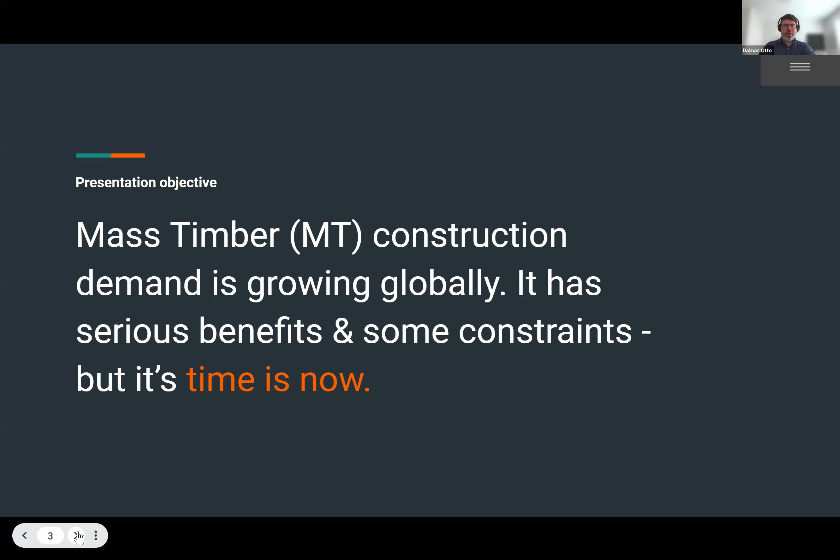So why mass timber? Mass timber construction demand is growing globally. It's no surprise. I think New Zealand has been on the forefront of this, and certainly in the work that we're involved with overseas, there's a lot of shared knowledge, a lot of shared interests, and also shared learnings across a range of different regions around the world.

So just the contents for today: a little bit of experience, although I won't go over that too much. Then contextualizing what is product development. We'll look at the products themselves. We'll look at some systems and projects, application. We'll look at some constraints and consequences, and then some round up around design for manufacturing, assembly, and disassembly, and the possibilities thereof.

Right now, I'm a full-time contractor with Lendlease's Kit of Parts team, operating out of Sydney, California, and Milan. We work on a range of projects and products, particularly the Google residential program. This is a joint development venture with Google itself in Silicon Valley, with the idea of constructing 22,000 apartments over the next 10 years, a lot of which will be mass timber buildings. So we're dealing with the IBC code over there, the Type 4 A, B, and C buildings.

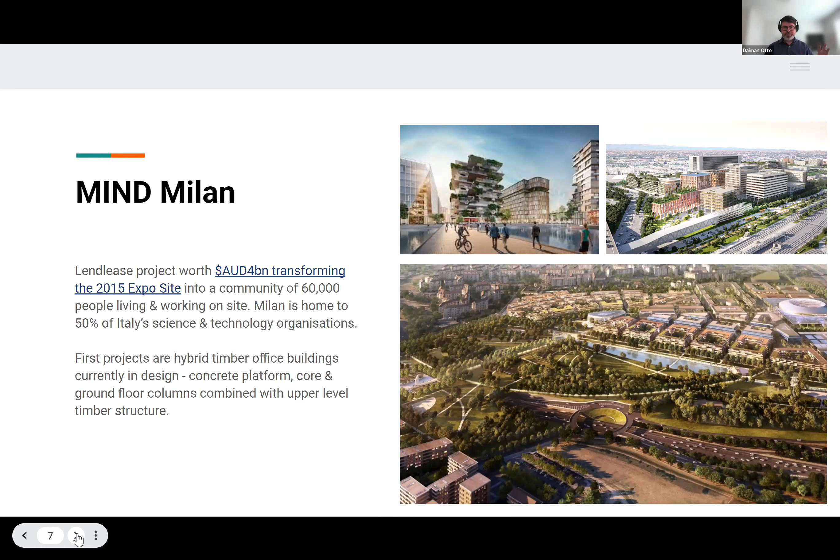And so basically what we do is product development. So what is product development? Product development as a discipline is very common in software and tech and manufacturing, but not so much in architecture, engineering and construction, which probably needs to happen more. We need to get more into a product development mindset in our industry. Effectively, product development is trying to understand problems in our industry, develop a hypothesis around how we might be able to counter those problems, and then collaborate and bring that to market.

And in fact, the team I work on has just brought a range of timber connectors to market, which you should be hearing about a little bit soon. That was with Lendlease's partners, Holmes Solutions, based out of Christchurch.

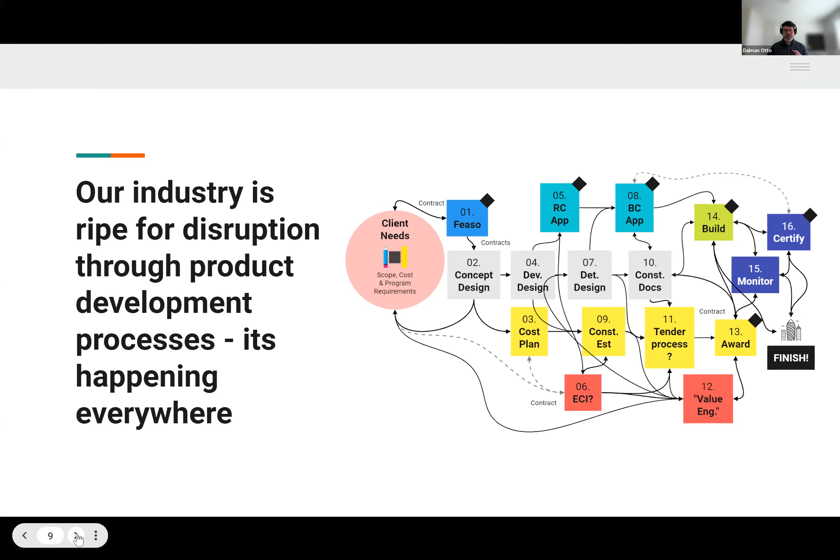So look, I think there's no surprise. You see this spaghetti diagram on the right. Our industry in New Zealand and globally is thoroughly ripe for disruption. So not just about mass timber, but about the entire building system, of which mass timber is a very fundamental part. But everywhere you look in the contractual chain, in the relationship chain, in the supply chain, there are opportunities for innovation, and that's really what product development is about in this industry.

So just to kind of put this, the 4 basic steps: the first step when you do product development is you uncover and understand the pain points of your clients. And I'm sure we could all list a number of pain points that we go through on a daily basis. Never mind our clients, never mind the end users, and never mind society, which ends up with these buildings that we create. So we do things like labor and activity analysis.

We look at code and practice. We look at materials and manufacturing, supply chain logistics, and most importantly, putting the client and the end user experience as the key data point that we need to consider when we're doing product development. The next thing we do is we'll create a hypothesis based upon stage 1 to test. So most of the time, what we're looking for is to reduce complexity.

We're looking for function doubling, so making something do more than one thing. We're looking to reduce activities on site, which therefore reduces labor. We're looking to shift labor, not necessarily just off site, but shifting labor from some kind of trade to another kind of trade to look for a delta. We're looking for health and safety increases, and we're also looking for new processes and materials.

The third thing we do is test through collaboration, and this is design and prototyping, so virtual and physical prototyping, time and motion testing, simulation, of course, working with supply chain, and then we're looking for feedback loops. We're looking for a go or no go at that point, because the next stage is to integrate that product into a project and bring it to market.

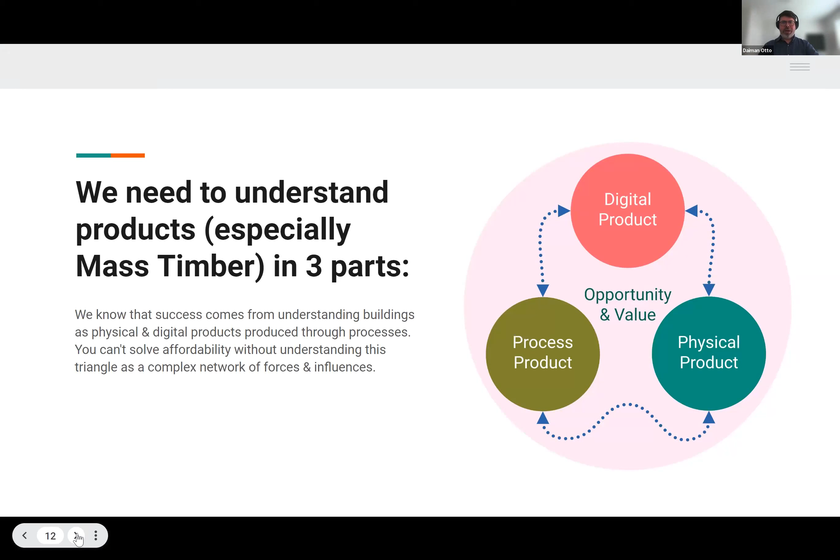So when we talk about the physical product, we're talking about three broad categories: LVL, glulam, and CLT. Of course, there are other sub products, I guess you could say, like nail laminated timber. But effectively, these are the three basic building blocks we have. In New Zealand, LVL is probably used far more than glulam. Offshore, where we typically work, glulam is used completely inversely proportionate to LVL. But these are the basic building blocks that we work with.

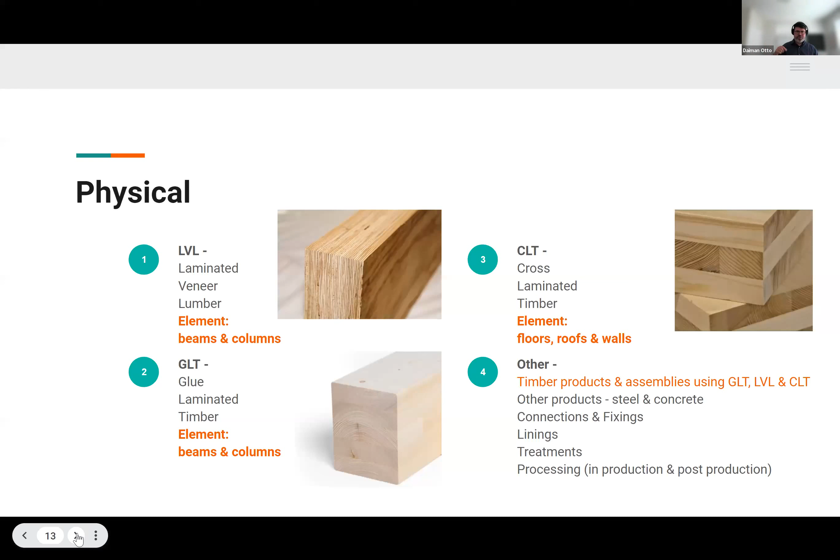Also obviously steel and concrete that's used, the connection fixings, the linings, the treatments, and the processing, the CNC processing and other post-production processes.

So why is there a global race to solve for mass timber systems? Everybody that we are in contact with, everybody in our team, is effectively in a race to solve for mass timber against BAU, business as usual, which in California is typically concrete. In other places, there are other kinds of systems, but there is a huge investment going into trying to crack the code for mass timber systems.

And there's a bunch of reasons why we would do that. Three just right there: 20% of the weight. So we look for savings of foundations, carbon emissions, of course, absolutely massive. And then I guess the fact that it's a renewable resource. There are a bunch of other factors that we're interested in that are less measurable, such as biophilic value.

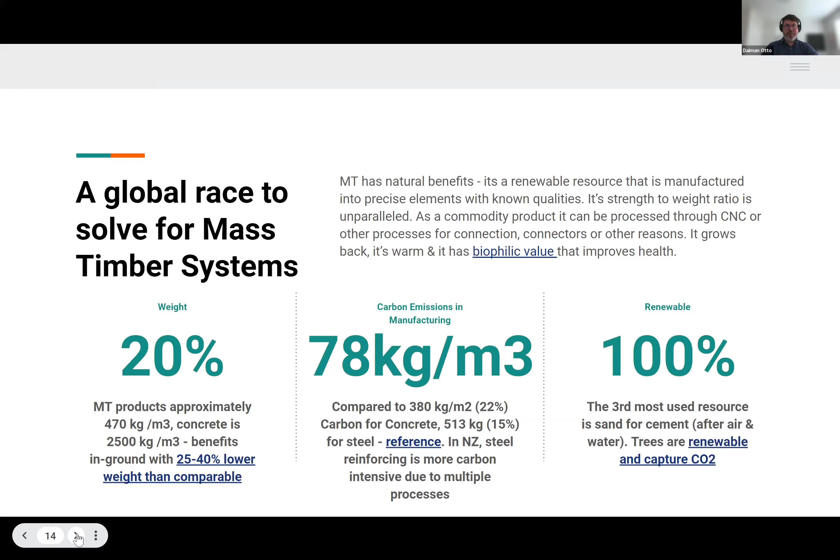But ultimately, there's so much incentive right now to solve for this particular kind of product to be able to ramp up at scale. You're seeing CLT producers and providers increase their number, increase production to try and keep up with demand, which is effectively doubling every 4 years. In New Zealand, we have access to all of the main suppliers of the products that we need to create the buildings we want to do, which is fantastic.

And also in New Zealand, we don't have the common need to sell the idea of timber to the client. We are a timber nation, so therefore we've removed at least one of those barriers for uptake. And obviously, there's a number of buildings produced over the last 10, 15 years that have been effectively pilot projects, trying to test and find the right combination of products, right combination of structure and other things to try and crack that code. We haven't quite got there yet.

There are also some common misconceptions that I think hold us up a little bit. One, probably very New Zealand centric, is moisture. Now, there's a lot of fear, doubt and uncertainty around moisture getting into CLT, which you simply don't find in other jurisdictions to the same level. And that's not because they've got different weather over there.

Sometimes they do, but effectively, in a lot of jurisdictions, moisture protection of CLT is somewhat down the list of concerns because there are other concerns that we need to look at. And probably the key concern right now that we're dealing with is acoustic performance. We get that relationship between span, thickness of CLT, vibration, and acoustic performance, which becomes quite an interesting feedback loop to try and resolve.

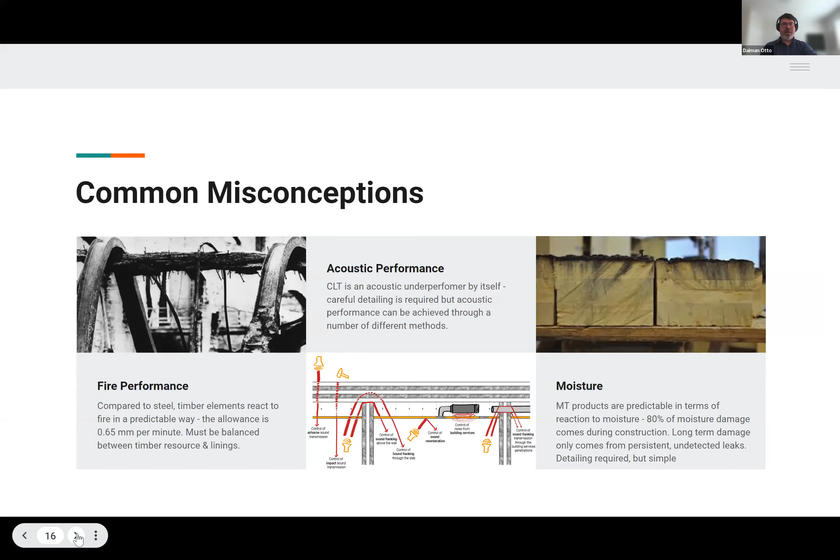One thing we do find is that policy in the States, where we mostly deal, is really driving towards exposure of CLT on a ceiling in a residential context, which means that you're shifting everything to the top of the board. But obviously you then have to deal with the underside of the board with respect to fire, because there's still a 2-hour fire requirement in the States for main structure.

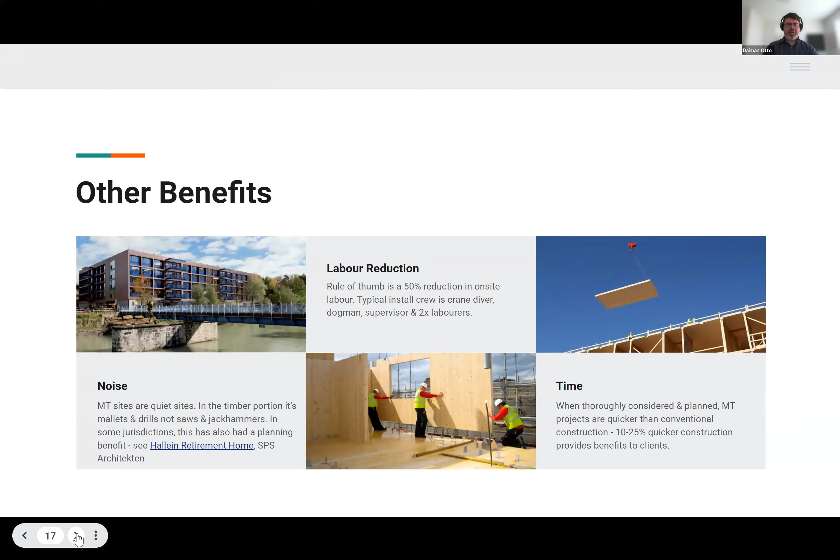And then there are other softer benefits like noise reduction. I was lucky enough to visit a retirement village in Austria, and the architect there told us that one of the main reasons offsite manufacturing with CLT was used was that it was a far quieter construction with far less impact on neighbours, which is something that we probably don't care that much about in New Zealand. But you kind of see those directions coming in. Labour reduction, time reduction, those are pretty well understood, provided that you get your design and your product strategy right.

There are also industry and policy drivers. Again, no surprises here. We are living in cities and countries that have made commitments to climate change. There is a C40 cities organization, of which Auckland is one. C40 cities is now something like C97, and basically they represent a quarter of global GDP. But effectively, the cities themselves are committing to policies that the market has not yet provided. So we need, as an industry, to create the solutions that our cities and our society can take up and start to use. And mass timber is critical for that.

Yeah, look, I'm not going to talk too much about global growth; we are all aware that every day you can find a new mass timber building going up somewhere. Demand is not slowing down, and it's happening everywhere. It's not just in the States, it's not just in Canada, it's across Europe and even into Asia as well. And I think we're at a bit of a tipping point right now.

So I look at the idea of electric vehicles as a bit of a parallel to mass timber buildings. The technology for car batteries has been there even before petrol was around, but there's a tipping point that we go through in which there's an acceleration of growth.

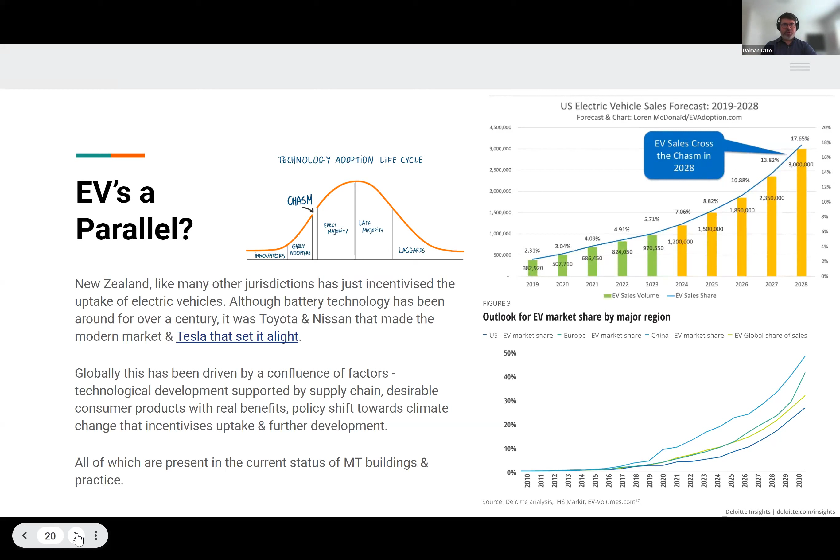And I think really the tipping point I find with mass timber is that when product and process match up together, and supply is there to back it, then you start to get an acceleration of uptake, or at least that's the hypothesis. Coupled with the policy shift that's going on, coupled with the general media and public interest around mass timber, I think it's a recipe for far more buildings to come.

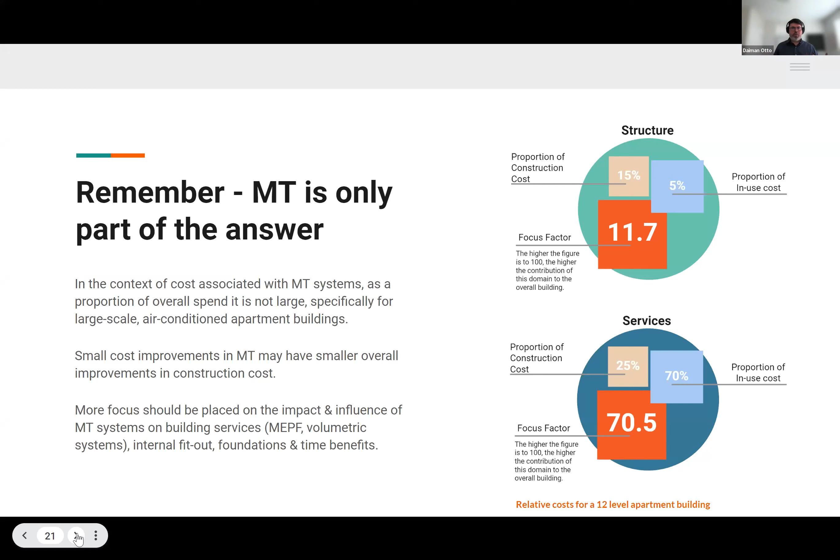But then if you look at the building services, in this case it's a fully ventilated and conditioned building, you make a 10% saving in the proportion of costs, you get a 2.5% saving. But more importantly, if you look at the cost around energy in use, it vastly outweighs the cost that you'd normally spend on structure during the life of the building. Which is to say that mass timber, from a product development perspective, is really about what it enables and what it allows for in the building rather than the product itself.

We have looked at a number of different systems and projects, which we'll go into in a second. And really, of the systems and projects that are available and have been tested and piloted around the world, I'd say that there's not one that makes vast sense over another. There are probably some that will fall out of favor, and we'll go into those in a second. But ultimately, what I'm saying here is that depending on the recipe or the construction methodology using mass timber, it's not like you choose a post and beam solution over a honeycomb solution and you get a silver bullet of cost saving. It doesn't work like that.

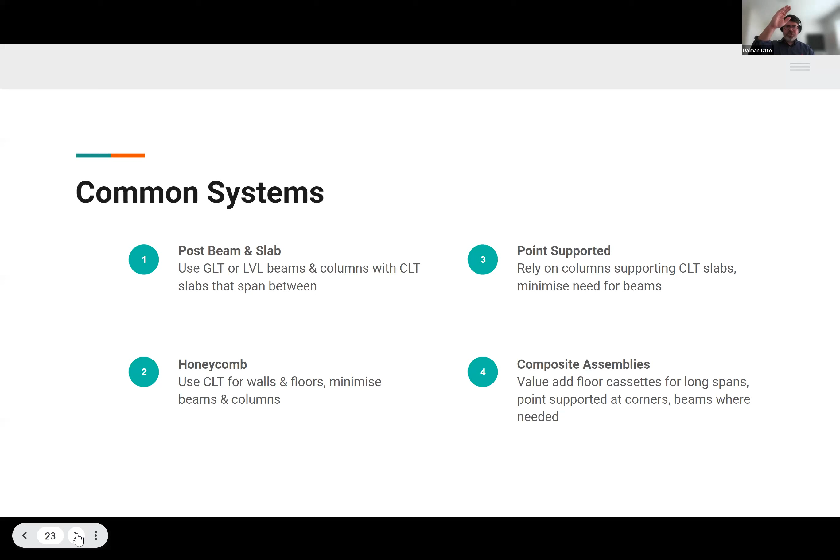So there are 4 common systems that are kind of recipes for how you put buildings together. The first one is a post, beam and slab, which is kind of an analogy to traditional construction. There's the honeycomb, which is where you use effectively CLT for walls and floors. There's the point supported, where you try and eliminate beams and just deal with columns and floors. And then there's some composite assemblies in which you combine products together to try and find an advantage in things like span and reduction of floor depth.

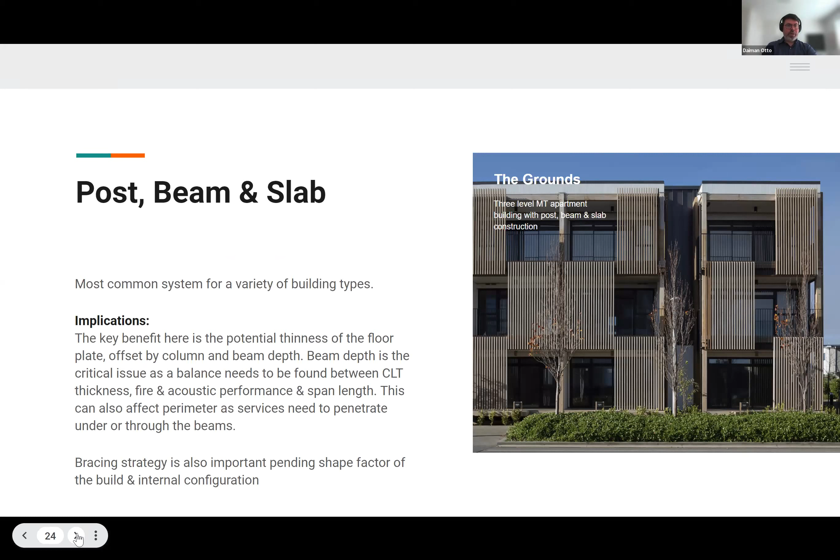So post, beam and slab, look, the grounds is an example of this. It's trying to find a mix between load-bearing, open spaces and bracing. And so I think that post, beam and slab is probably, from my perspective and what we're looking at, the system to choose overall when you look at the cost, I guess the overall trade-offs between what the system allows for, in a residential context I'm talking about.

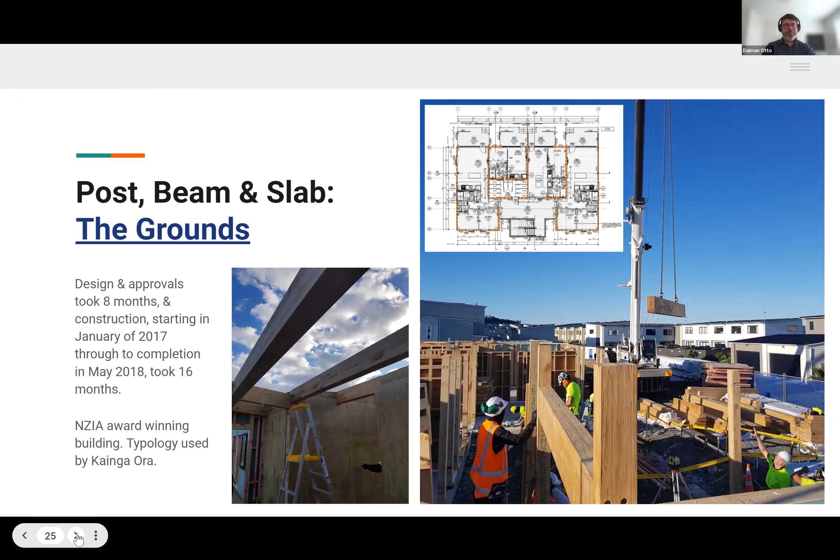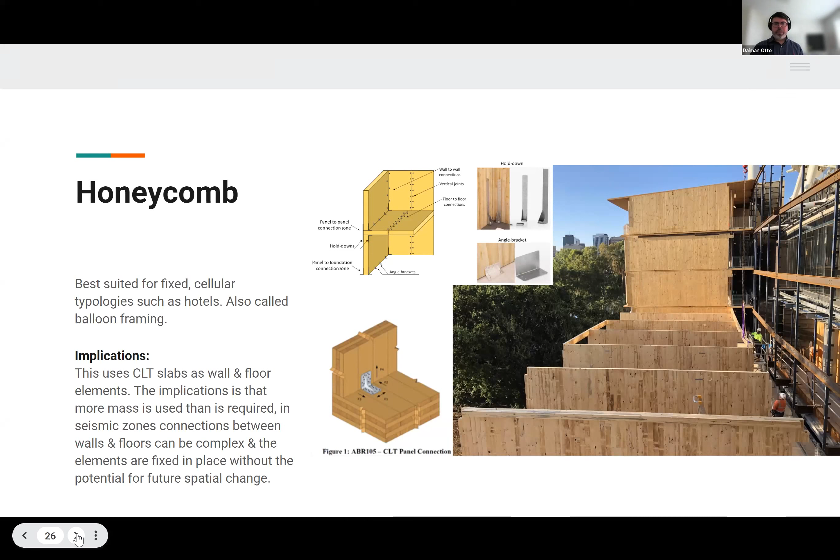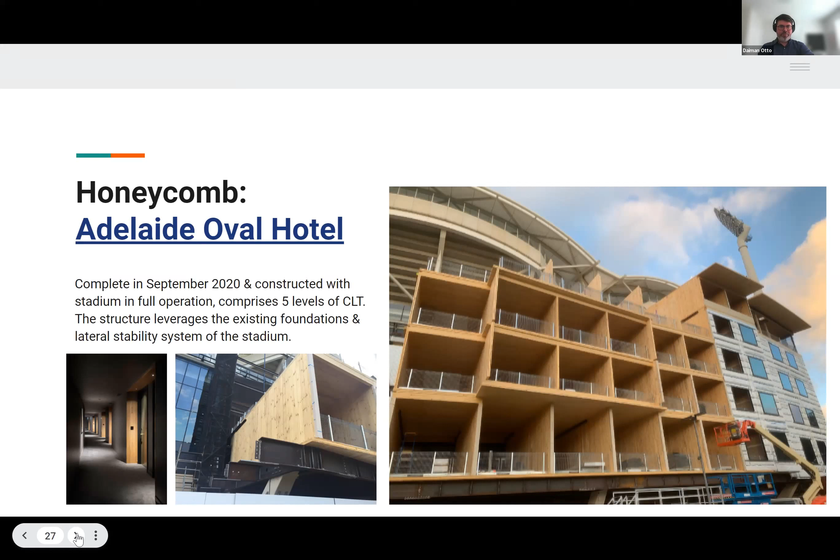There's the honeycomb structure, pretty good for quite cellular floor plates like hotels and student accommodation, things like that. But I know on the call there's lots of experience around this kind of structure in New Zealand, and we also know that there's some issues around things like connections and processing cuts as well. But still an appropriate typology, and this Adelaide Oval Hotel, which you may be aware of, is a nice example of that, effectively a building constructed on the side of the Adelaide Oval, whilst the Adelaide Oval was in operation, for a hotel, which is perfect use for this.

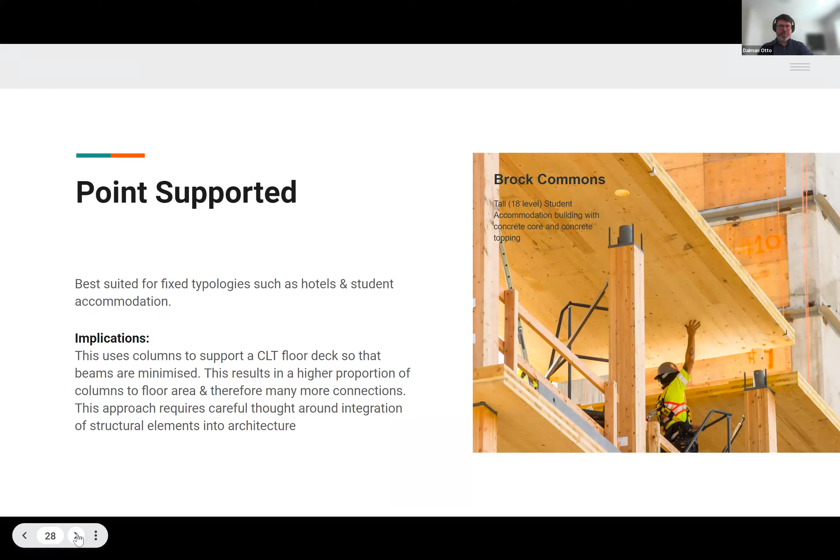Everybody knows about this one, Brock Commons. In some cases, it's a leading building due to its height and due to what it tried to achieve. But we are seeing that the point supported approach is not quite as common, but it still has its place. Key to this kind of system from what we're seeing is having really sensible connections, really easy connections, and also a very structured and sequenced way of bringing up your facade, of course.

Just a note on some of the differences between the New Zealand situation and the US situation when it comes to floors. So we find that in the States, the incumbent system for flooring is to pour gypcrete. And so you'll find that in mass timber buildings, there's an acoustic layer, and then there's effectively a pouring of gypcrete to increase mass for acoustic reasons, but also for fire reasons as well.

So it's not something we see here too much, or at least I haven't seen the use of gypcrete being used as a floor substrate in NZ. But I guess the other reason that it's used is that in California and in other states, they use the International Building Code, and mass timber buildings are driven by what we call Type 4 buildings. So you have Type 4 A, B, and C buildings, and each of those is limited by area and height. But the one thing they have in common is that all main structural elements need a 2-hour fire rating.

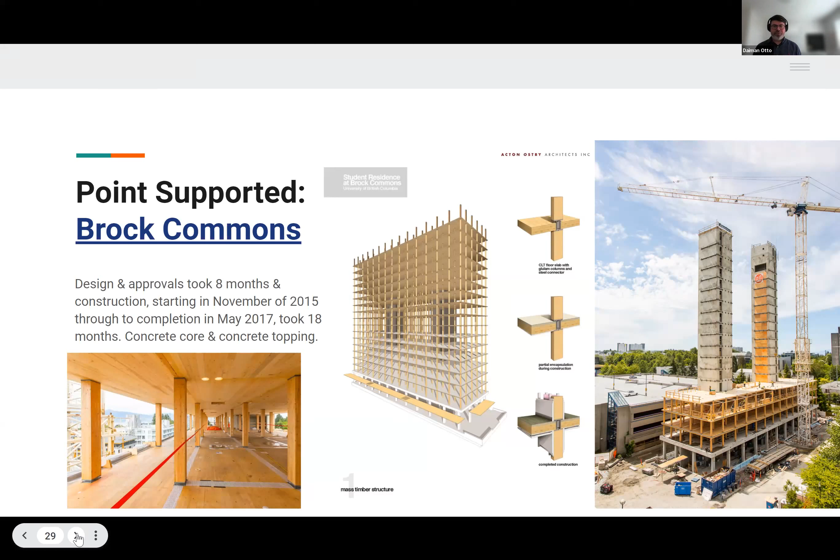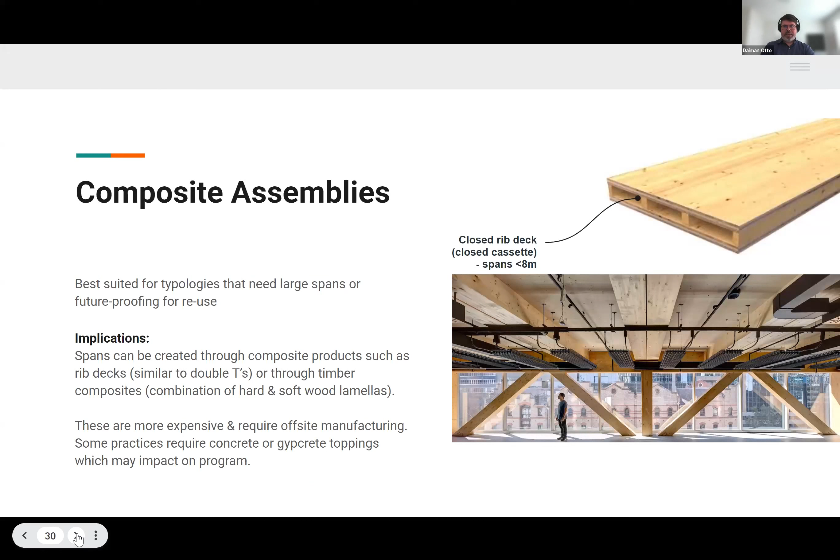And so you're getting into that space in which you are trying to find the best balance between acoustic requirements, fire rating, and structural dimensions of the product. Then there are composite assemblies. So these are assemblies in which you create something like a rib deck or a closed panel or a floor cassette. The main reason you would do this is to achieve longer spans, primarily. You may also be under pressure for overall building height because of planning restrictions. So if you go to a composite floor, you might be able to get a thinner floor out of it.

You can see this is Daramu House that Lendlease built a few years ago, which is operating a 9 by 9 meter grid. You have some very deep beam sections here, but then you can also have a kind of a composite beam slab option, and obviously allowing for exposed surfaces. This is a very deliberate choice by the client to expose this, but Lendlease was under pressure in terms of planning height to bring the height of the building down below a certain level. Nonetheless, a beautiful building, and for people involved in financing and investment of these buildings, it was heavily oversubscribed in terms of both investment and in terms of rental.

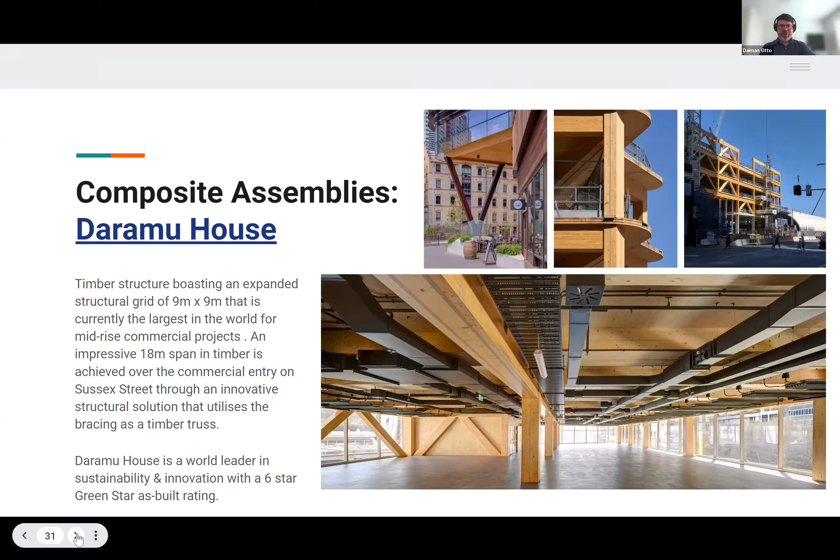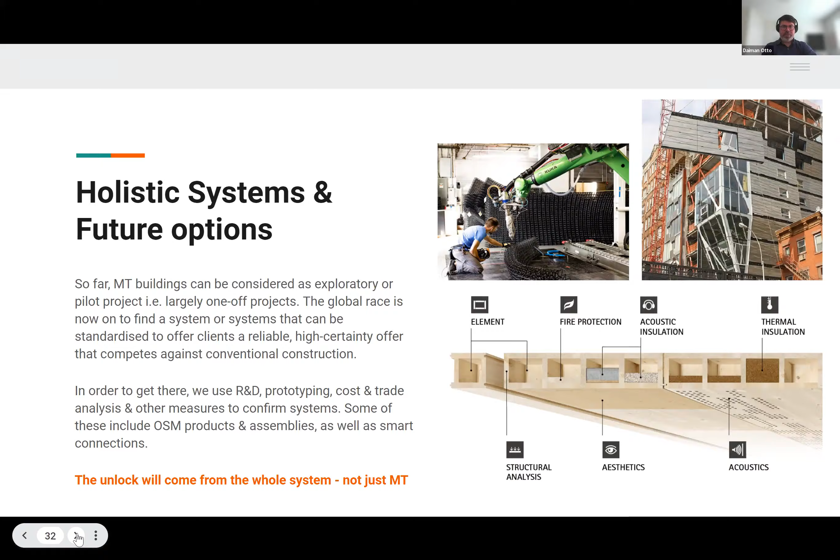And there are some future options that are developing. Lendlease has an Australian Research Council grant in which we partner up with universities like Monash and Melbourne University, University of Queensland, and so there's a study going on right now about low carbon long span floors, and so there's a lot of potential here. The key thing is that we need to balance off the value added potential of these kind of flooring systems against the labor that's required and the logistics costs that are associated with making these kind of panels. Because right now, no major CLT provider is able to offer a composite panel using, say, for example, ribs to increase the spanning capacity. But if anyone knows of somebody doing that, I'd be quite interested in finding out. So yeah, that'd be interesting to consider.

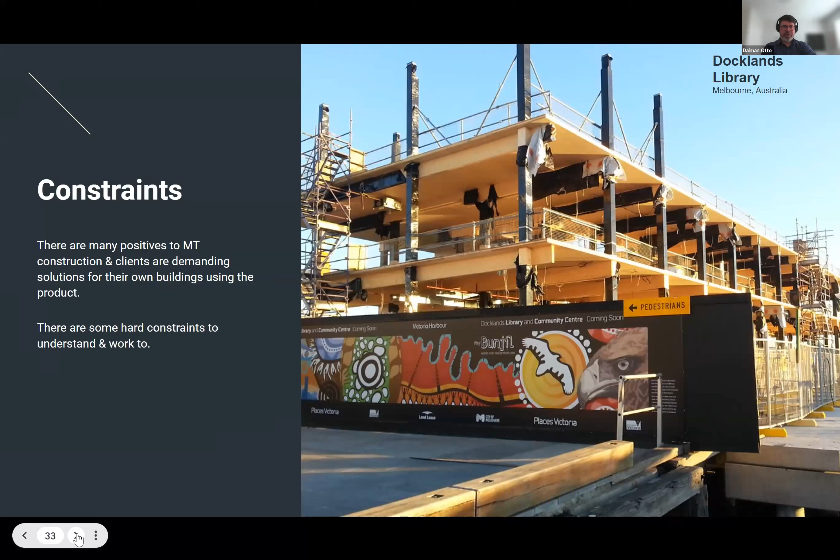So it's not a free lunch though, by any stretch of the imagination. Anybody who's worked in a mass timber building understands that we get into this area in which we have to balance trade-offs. We get into a real whack-a-mole situation in which we solve for something down here, something else pops up. And so in our work, we've identified around 14 major factors that go into an algorithm for choosing the best kind of system. And each of these factors can have different kind of effects. And so I talk about this in terms of procedural effects, asymmetric effects, and entangled effects.

So procedural effects is where in the serial nature in which we make decisions, one choice here flows on to the next thing, which flows onto the next thing. And basically, if we're not careful, you start to get waste building up. So for example, you make a decision about spatial grids, that in turn creates deeper beams that then might not be required if the spatial grid wasn't so long, which then creates building services issues in which you're starting to do things like punch holes through beams and increase processing costs and those kind of things.

Then there are asymmetric effects. So this is where one thing here has an outlandish or a far bigger scale effect on something else. So for example, you see this all the time in which structural calculations to drive section sizes tip into areas in which they pop out of the standard size range for a manufacturer. You get into the need for making the section size bigger and then trimming down the four sides of the glulam to get back down to the structural size. So you're paying for waste. And sometimes, depending on where you are, if you're dealing with glulam, the costs for block gluing can be exorbitant. Something like a 50 to 100% increase over the cost between a standard size and a block glue, depending on where you are, of course.

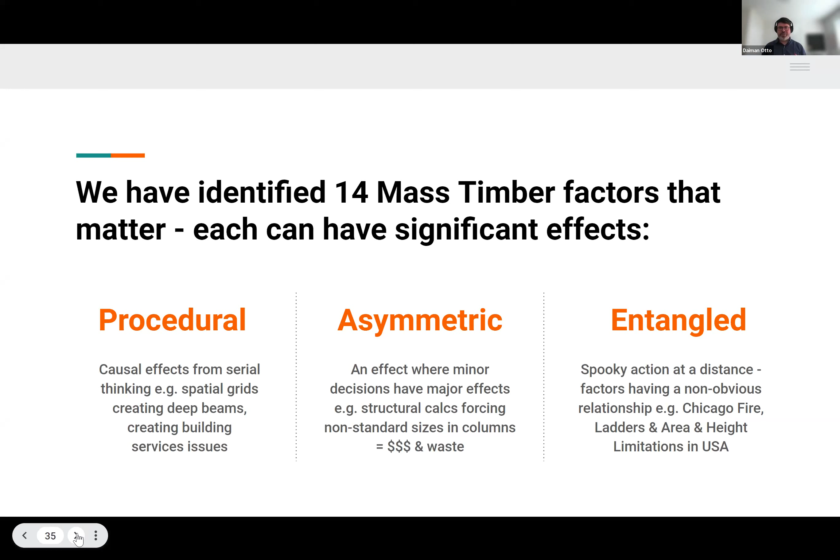And so I'm just going to pick up three of the factors that we typically deal with. So the first one is this relationship between acoustic and fire. As I mentioned, in the States where we do most of our work, there's a 2-hour fire rating for the main structure. What this means is that prescriptively, you either coat or cover everything in 2 layers of plasterboard, or you size the timber member up to account for char for 2 hours.

And so on one hand, you're paying for more material, on the other hand, you're paying for more labor. Never mind, both of those situations don't do anything for your acoustic requirements. In the States, they have the same STC IIC rating as we do. So typically, they're looking for a minimum of 50. They don't do field testing, but there's a requirement there for that kind of rating. So we all know we have to add things to mass timber to get it to perform correctly.

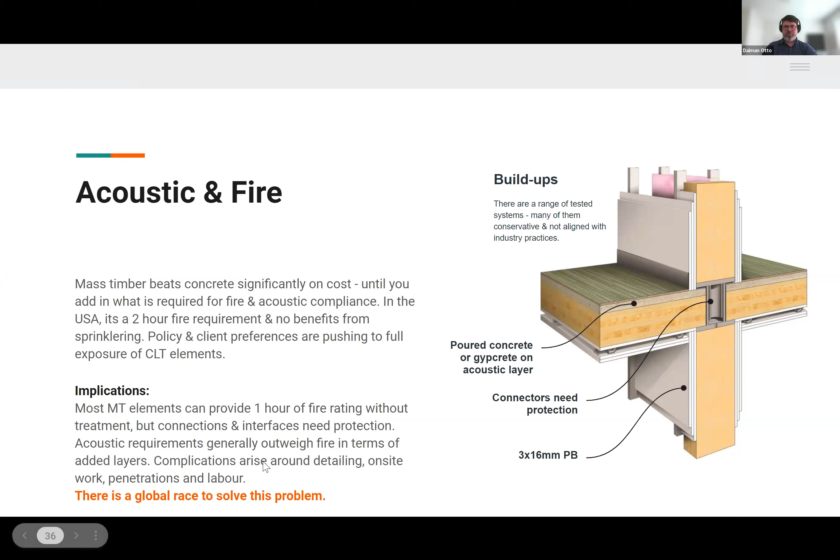As I mentioned before, in the States, gypcrete is the primary way of dealing with this. And in fact, what sounds like a bit of an anathema, introducing a wet topping inside a dry construction methodology, is actually the most efficient way of doing it at this time. But I think we all know there's a global race to try and find the fix for this. And so there'll be some way of solving, or making more valuable, the things we need to do to CLT to get that to stack better in terms of cost.

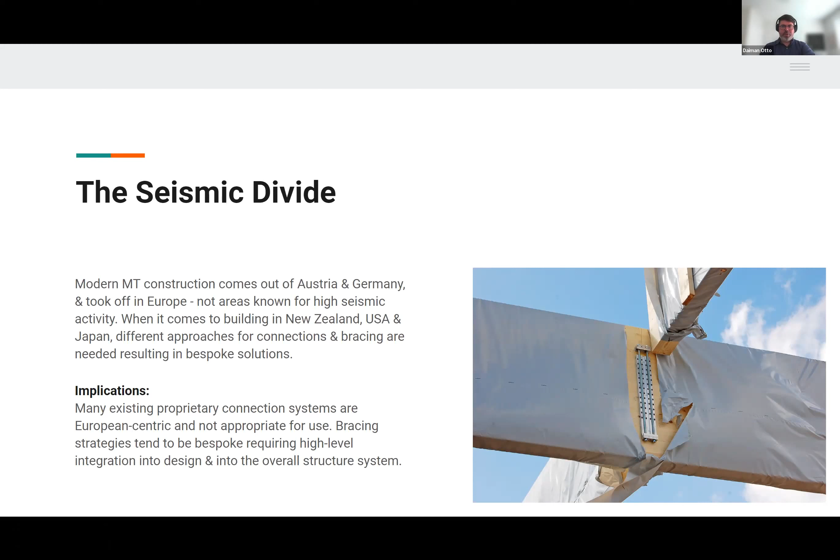So one for us is the seismic divide. We know that modern mass timber construction primarily came out of Europe. When we look at the proprietary connectors that are available for mass timber buildings, we find that a lot of them just simply don't respond to the kind of seismic requirements that are in New Zealand, the US, Japan, and other places. So there's quite a lot of interest right now in the connector space, and I know a lot of people are working on this. I'd suggest reaching out to Holmes Solutions, who have just completed bringing a connector system to market with Lend-Lease. So that's something to look at.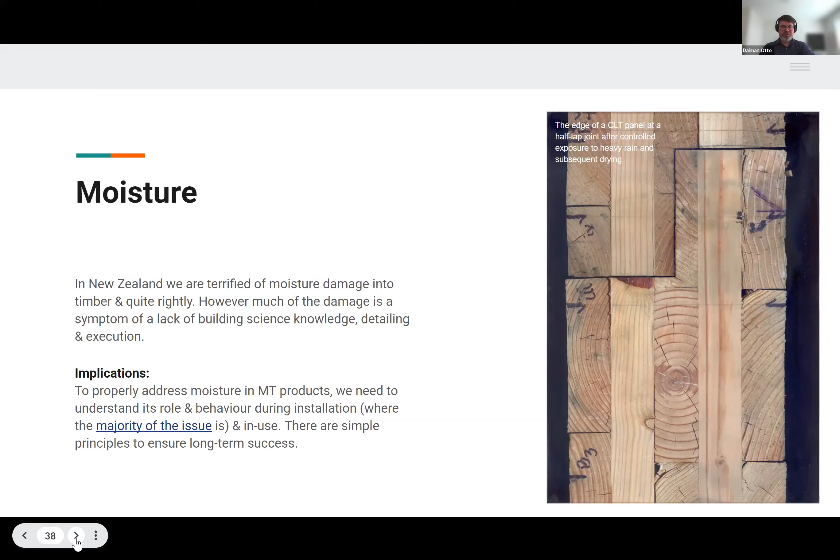And lastly, moisture. I think I touched on this before, so I won't go into too much detail here. But all I'd say is in the 14 factor model that we have, moisture is down the track somewhat. We all know that New Zealand is reasonably unique with respect to treating all bits of timber effectively. This is not the case in other places. From my perspective, building science and building physics is the way to deal with moisture in buildings when it comes to mass timber. We also know that by far and away, most of the damage comes during the construction phase. So we have to treat that very seriously, of course, but it is treatable.

I've got a few more slides left to allow any time for questions, but I just want to touch on design for manufacture, assembly, and disassembly, and supply chain integration as basically critical for the successful rollout of mass timber systems.

So the principles for mass timber: the first thing we need to do, as I mentioned before, is manage these trade-offs. And I'm sure a lot of us on the call would be familiar with this whack-a-mole situation that goes on, in which we are trying to solve for a certain aspect of building, and then discovering later on that that has some implications for some other aspect. So from my perspective, it's about trade-off management. There is no perfect solution. It's just about the most perfect given the settings that you choose as the ones that you want to try and hit.

The next one is the physical to digital relationship. So one of the key drivers of mass timber uptake is the fact that you can get to a point in which the design information can drive manufacturing information. There's still a threshold there, which is quite hard to cross in terms of software and those kind of things, but that's being worked on now. That won't be so much of an issue in the future. But the idea that whatever you draw can effectively be processed during manufacture is something that's quite unique in terms of its precision.

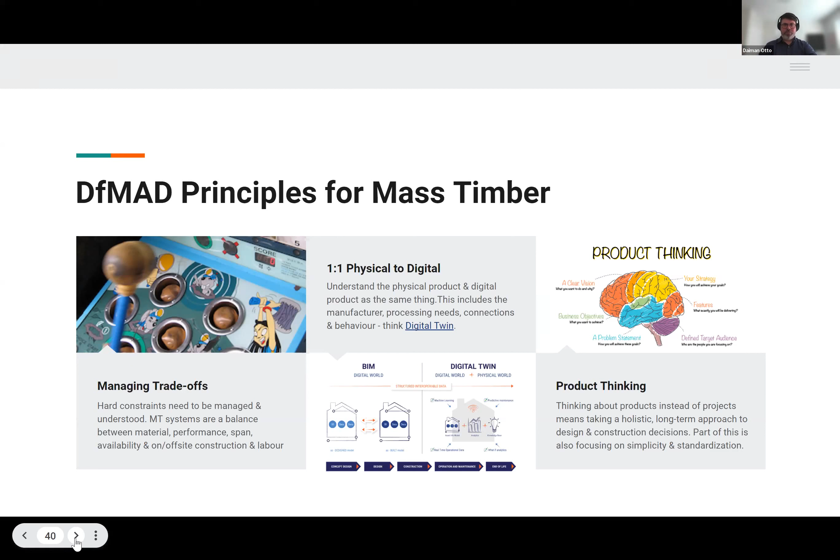And the other thing is to think about this in terms of product. So instead of the collective amnesia we have with respect to projects, thinking about projects as one-off discrete things, we need to start thinking about product thinking in terms of scale, in terms of efficiency, in terms of learning from feedback loops and folding them into getting ever better at what we do.

So if we are able to do design for manufacturing and disassembly correctly, there are some things that are facilitated by that. The first one is we can get into day one circularity. By which I mean, as we are designing a building or a system, we are able to attribute to that specific element a kind of recipe for circularity over time. But if we're genuine about circularity, we have to understand that maybe that beam needs to be disassembled at some point, which means we have to think about connections, which means that wet permanent toppings sitting on top of materials that could potentially be reused is not the way to go in the long term.

The next one is deep data. So whilst we are attributing a circularity recipe for everything inside a building, we can also understand the embodied carbon, the carbon to manufacture, the carbon sequestered, and effectively the responsibility we have over the long-term life of the building to preserve that carbon and take ownership of that.

And the other thing that's interesting is design automation. I recommend having a look at Lendlease Podium's website, in which if you take a product thinking view, you're able to effectively get into design automation, in which you move well beyond BIM into an instantaneous instantiation of building systems down to LOD 400, 500 for manufacturing in minutes rather than months.

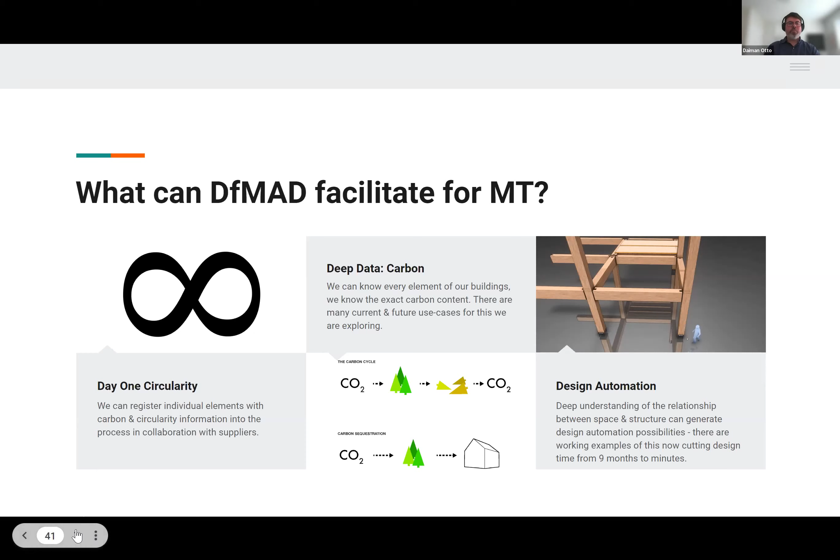So just to summarize, mass timber is a great material. It has its constraints, it has its consequences, but it also allows for things that we haven't quite yet worked out are available to us. Should we follow these principles? Should we explore them deeply? So I think that's my last slide.